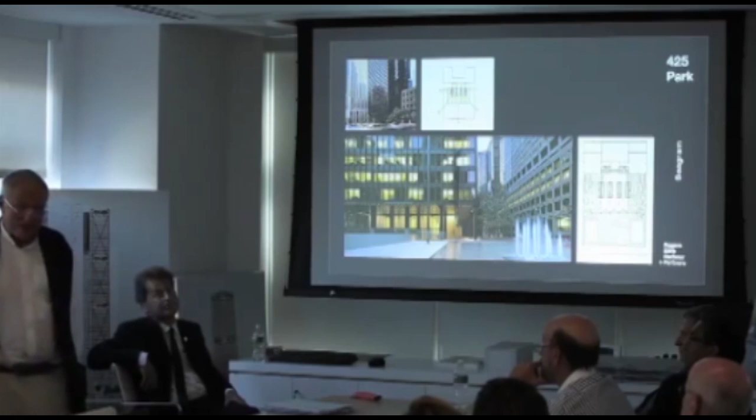Otherwise, it's basically as it was when I used to go there. City and context is a very strong driver in all of the buildings we've approached. It's our understanding of existing conditions, the physical topography, the cultural and political aspirations of areas across the world that we need to work within. It's very important that we begin to attempt to understand that. The responses will always be slightly different, but each time they can be rooted either through harmony or contrast to their existing setting.

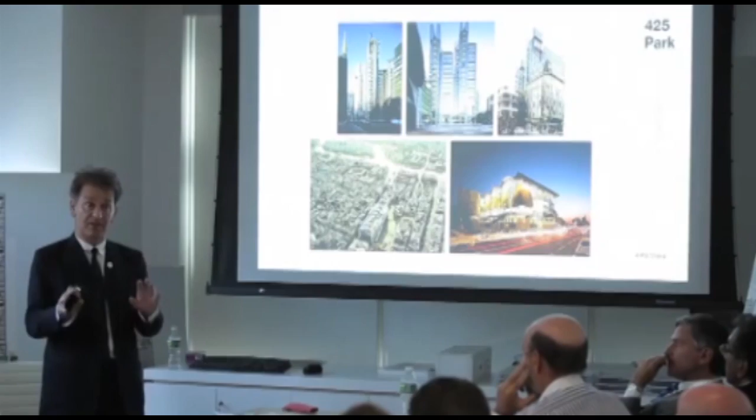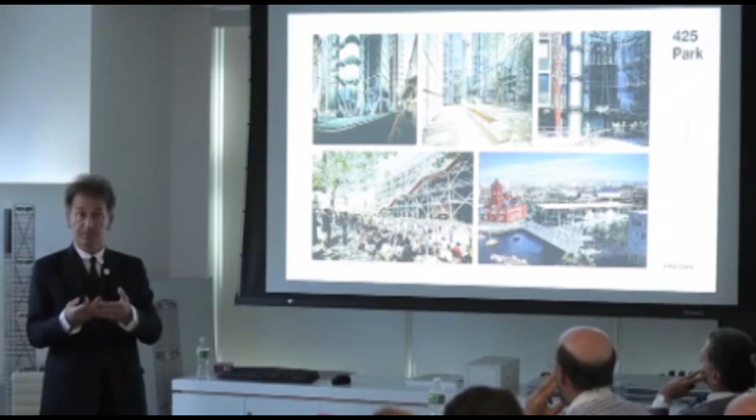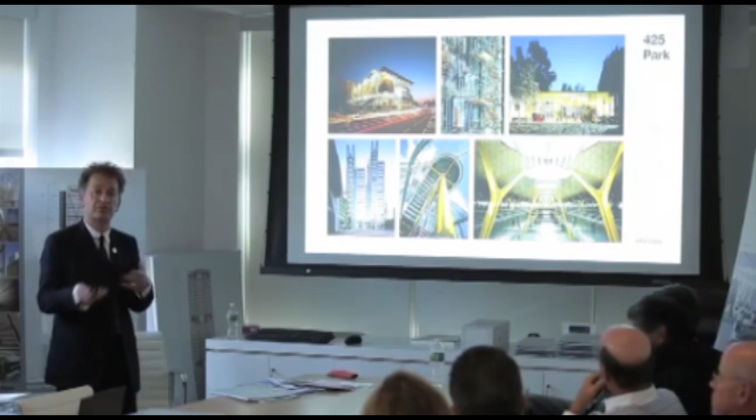This is what I tend to call public realm, which is we have a responsibility to those people that use buildings, but also to those that don't, passers-by, people where these buildings have a profound impact on public realm. We're quite interested in a term: legibility. What are buildings trying to say? There's a great deal of discussion about what statement a building is making, but in many instances just the basic components of what makes a building work are spectacular.

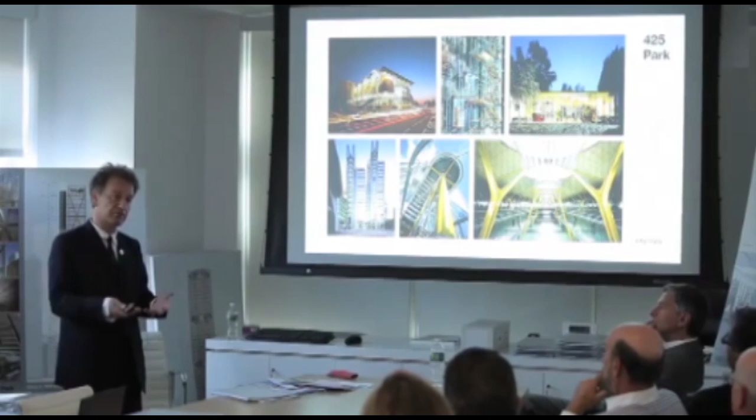They're things that constitute what we believe is a modern architectural language, which is really a celebration of all the things required to make that building work, celebrating them in an appropriate way. What we've shown here is a three-dimensional interpretation of maybe not doing a wedding cake, which are structurally quite difficult, awkward, and hard to stabilise. And to create something which begins to exploit...

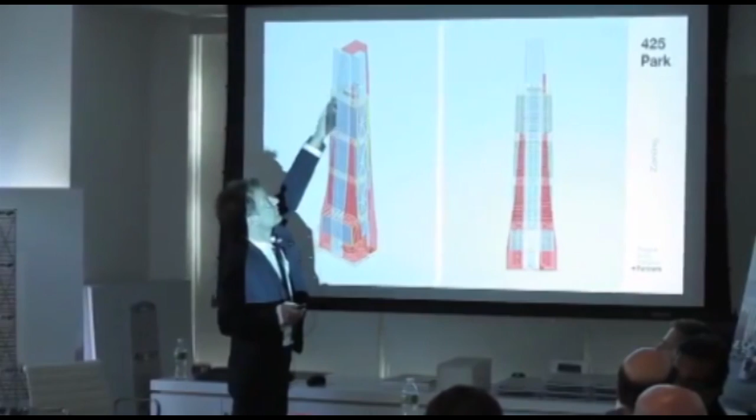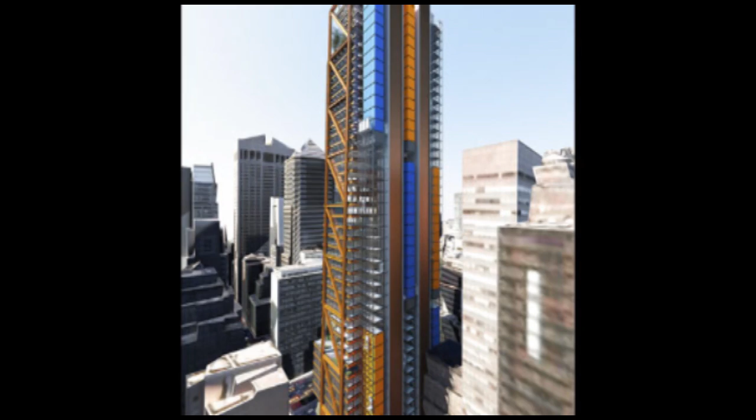Those middle thirds in the central section, and be able to pick up some of the street wall and begin to define a boundary that Richard suggested has other possibilities for how it might relate to Park Avenue. You can see this slight leaning. We're desperate to make it feel like one building that isn't sat on a funny suitcase, something that you can feel looks the same because it's the same cladding, but isn't really the same spirit as what's above.

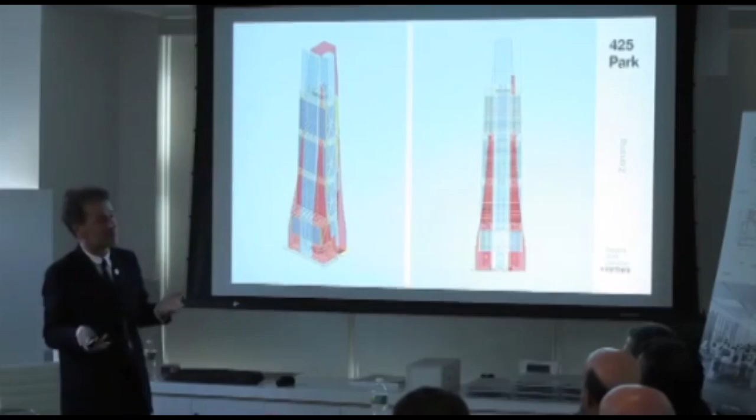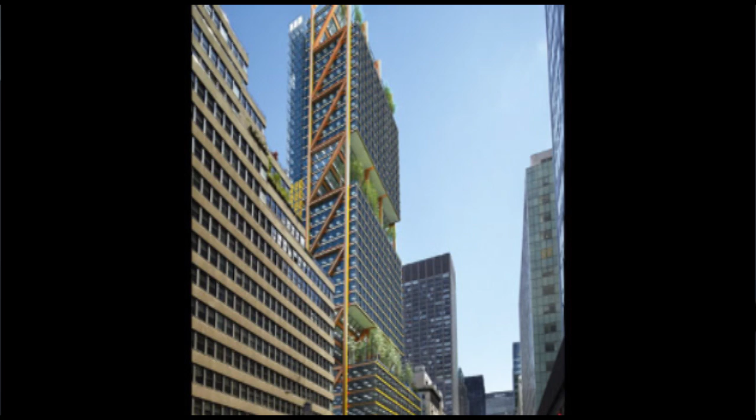As part of our presentation for two schemes, which you suggested, we felt there was one approach, but the retention of the 25% of the existing, which is as-of-right development, really affects this area and its relationship to the public space. So I'll take you through those in a moment, but it's about defining that edge and then having a very simple, systematic...

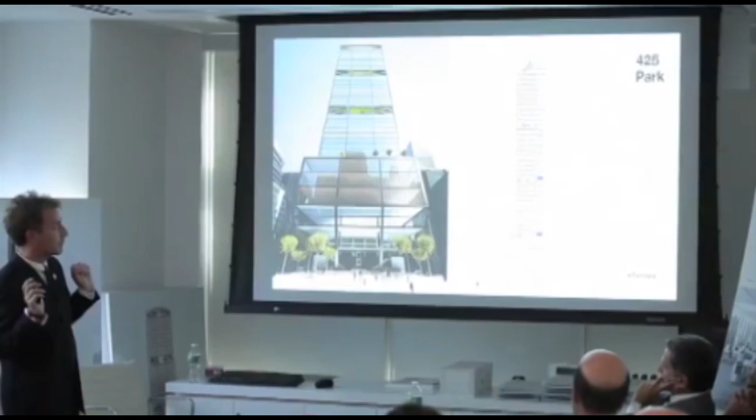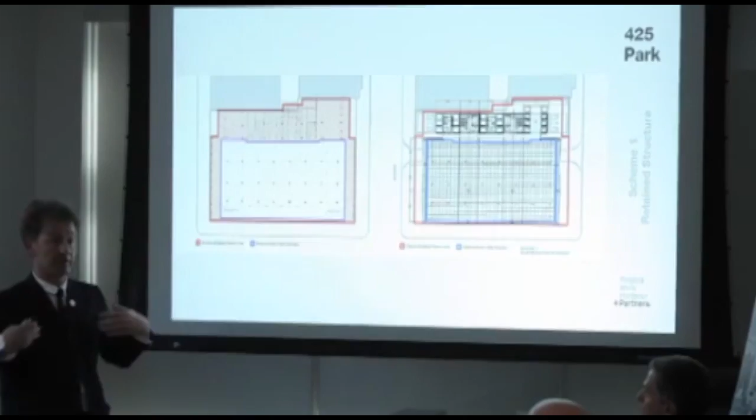Flexible floors above. Now these are the two options we're going through. We've got Scheme 1 and Scheme 2, but this first one is the retained scheme. So what this is demonstrating is the existing line of this building is set upon the existing line of the existing core, so you could remove the core and still leave what we call the net area, the rentable slab, in front of it. We still think some of the urban questions related to frontage, maintaining Park Avenue, and building up a tall building of whatever height you can negotiate, is possible.

But what this suggests is the notion of creating this public space. So everyone's crossing on corners across Park Avenue, and the idea of crossing here and having this cut back so that it's opening its corners to all of the major points of how you actually cross Park Avenue. So these are the garden spaces you were talking about.

These again are just our internal studies, we've built a 3D model of this basically. I think it could begin to give something slightly different rather than just another terrace. And what we suggested is that it would be nice if you developed a theme, whether it's this or something else, something that runs through and informs all of those roof levels.

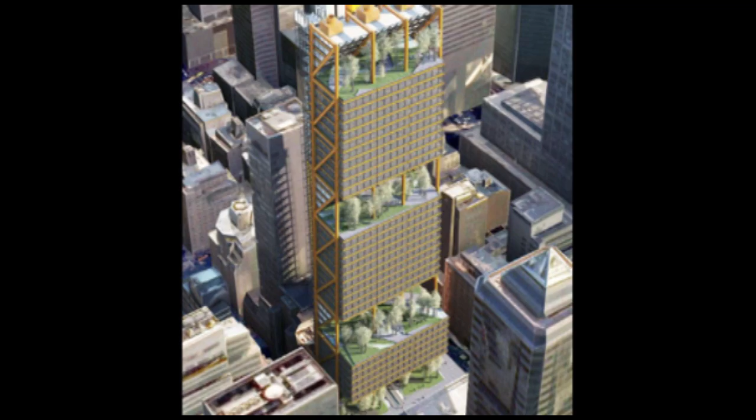I think one of the things we've tried to do is highlight some of the issues you'll perhaps be facing, and also to deal with something which is simple and systematic to build.